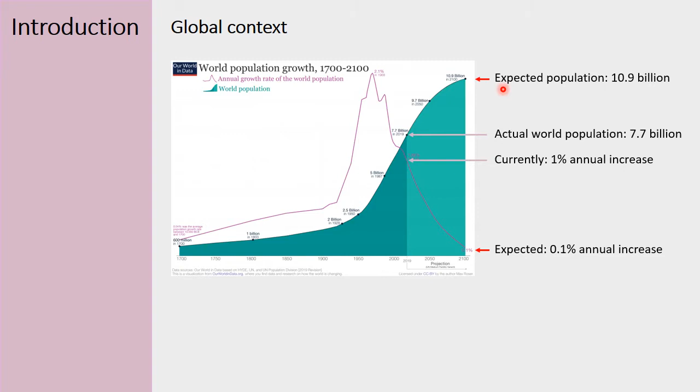The world population has been increasing, and we have currently attained a yearly increase of 1%, leading to a world population of 7.7 billion people. It is expected that even though the increase rate will be reduced, the world population will be higher than 10 billion in 80 years. Therefore, the need for raw materials, houses, clothes, food and energy will highly increase as well.

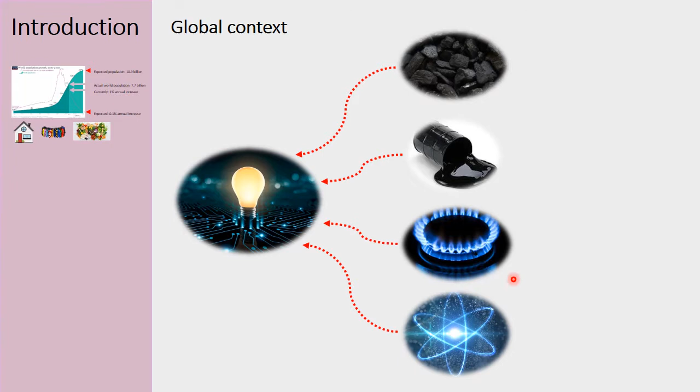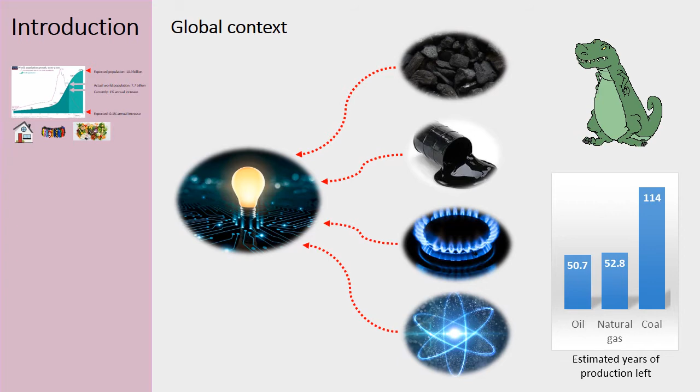Currently, the main sources of energy used worldwide are fossil fuels such as coal, oil, natural gas, and nuclear power. However, these sources are limited and we currently have a much higher consumption than production rate. For this reason, it's estimated that in the near future these sources will be completely consumed, which is why many researchers are currently working on substituting fossil fuels with renewable energy sources such as biomass, solar, wind, and hydroelectric power.

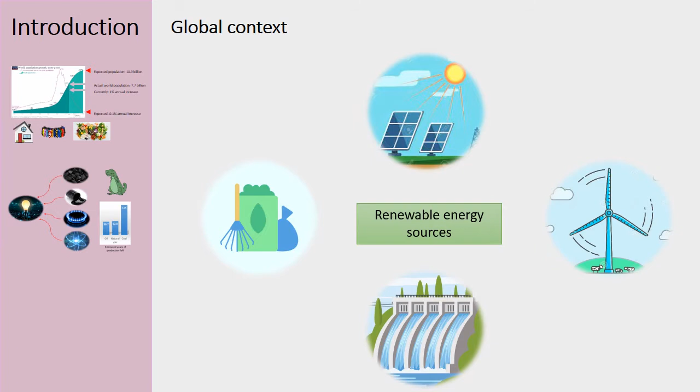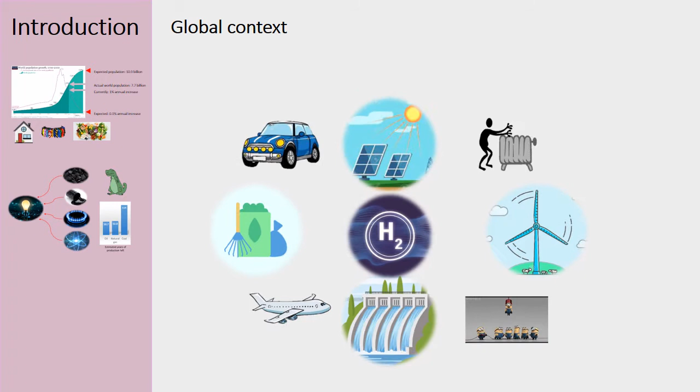Hydrogen is considered an important energy carrier because it can be used as fuel for transport, electricity, and heating. Currently, hydrogen is globally known and used for many applications. However, 95% of hydrogen is produced from fossil fuels. Even though it can be considered a clean energy, it is still not yet sustainable for the far future. For this reason, it's important to shift from fossil fuels to renewable sources as a source of hydrogen, for example using electrolyzer technologies to produce green hydrogen, or using chemical reactions such as the dry or steam reforming of methane.

Both of these reactions produce a synthesis gas made of hydrogen and carbon monoxide, which can be used individually or together in different industrial applications, such as methanol or ammonia production or Fischer-Tropsch processes. Even though these reactions have great advantages, such as eliminating one or two of the main greenhouse gases and producing a clean source of energy, they also have a big disadvantage, which is the endothermic nature of both reactions.

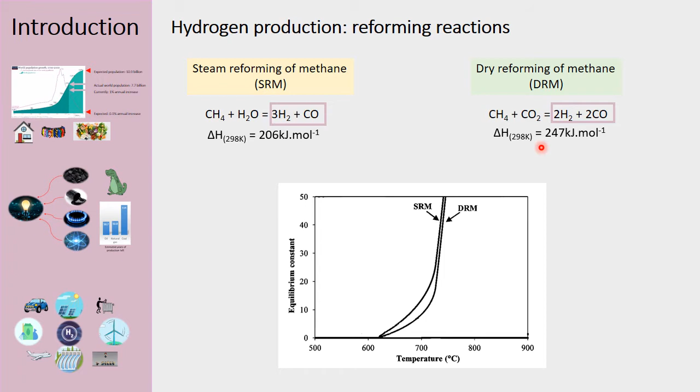This fact renders them thermodynamically impossible to occur at temperatures lower than 630 degrees. In the temperature range favorable for the dry reforming reaction, several secondary reactions such as methane decomposition, water-gas shift reaction, and Boudouard reaction can also occur. It's therefore important to use a catalyst in order to increase the kinetics of the DRM and SRM reactions at lower temperatures and to be selective to these reactions as opposed to secondary reactions.

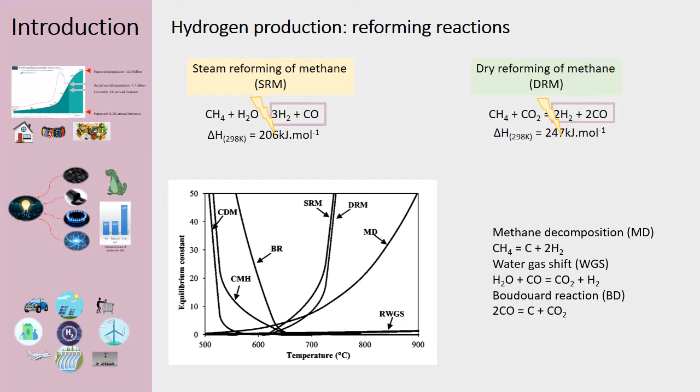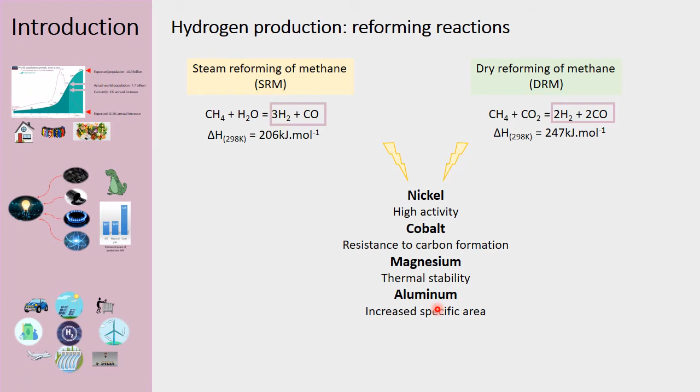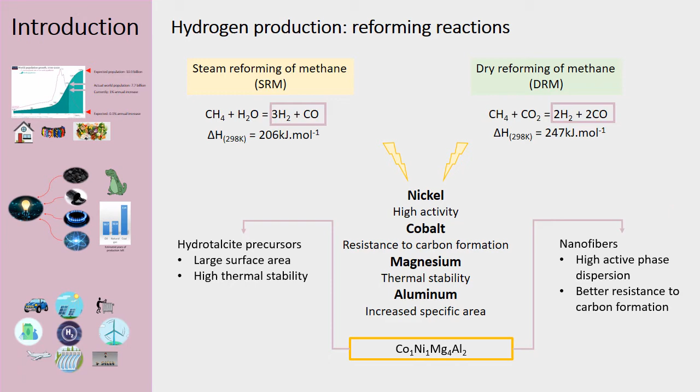The materials we used for this study contain nickel and cobalt, known for being active in the reforming reactions, magnesium, which increases the thermal stability of the material, as well as alumina, that increases the specific area. The materials were synthesized by two different methods to obtain hydrotalcite precursors that have a large surface area and high thermal stability, as well as nanofibers that increase the dispersion of active phase and increase the resistance to carbon deposition.

The nanofibers were synthesized using the solution blow spinning method. The solution containing the nitrates, ethanol, and PVP is inserted in an airbrush, projected using nitrogen onto an inox collector.

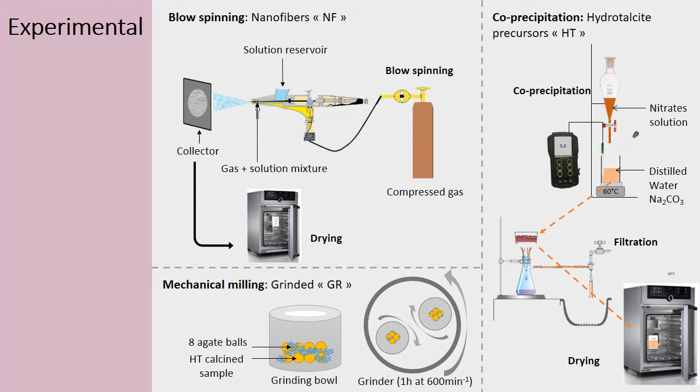Hydrotalcite precursors were synthesized by coprecipitation while maintaining a pH at 9. Both of the samples were calcined at 800 degrees for 4 hours. Part of the hydrotalcite calcined sample was ground in a mechanical miller for 1 hour in order to study the effect of grinding on the performance of catalytic materials.

The catalysts are tested in the steam and dry reforming of methane in this setup, with the only difference being the gas feed composition and flow rate. Prior to the test, 100 milligrams of calcined samples are reduced at 800 degrees for 1 hour using hydrogen. The CH4, argon, CO2 or H2O mixture is passed through the quartz reactor containing the catalyst and then analyzed by gas chromatography coupled to a TCD detector. The 12-hour stability tests are conducted at 700 degrees, during which the activity, selectivity, and stability of the catalysts is monitored.

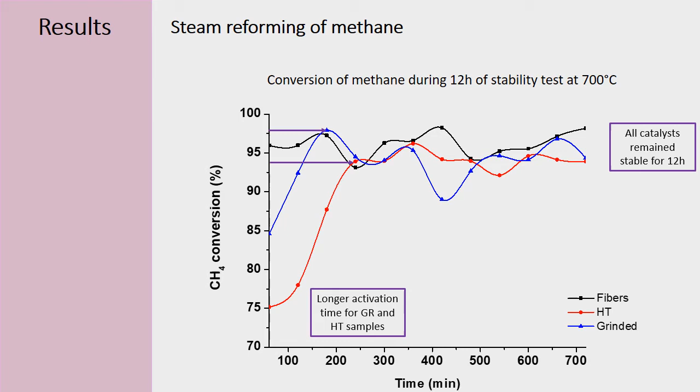This graph shows the activity and the stability of the catalysts by following methane conversion during the 12-hour tests. First of all, we can notice that all catalysts remain stable during the 12 hours. Moreover, an initial activation period was needed for both hydrotalcite and grinded catalysts, while the fibers were active since the beginning. This could be due to the reducibility of the oxides.

This graph represents the average methane conversion during the stability test after the initial activation period. A higher activity was noticed for the fiber materials. However, no difference was noticed between the calcined and the grinded hydrotalcite.

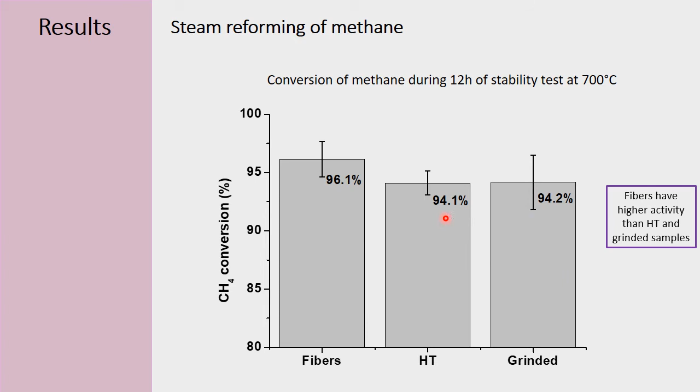Moreover, all three catalysts showed extremely high selectivity to hydrogen, which means that all of the methane that was converted was transformed into hydrogen. To find out if this was due exclusively to the steam reforming reaction, we monitored the H2/CO ratio.

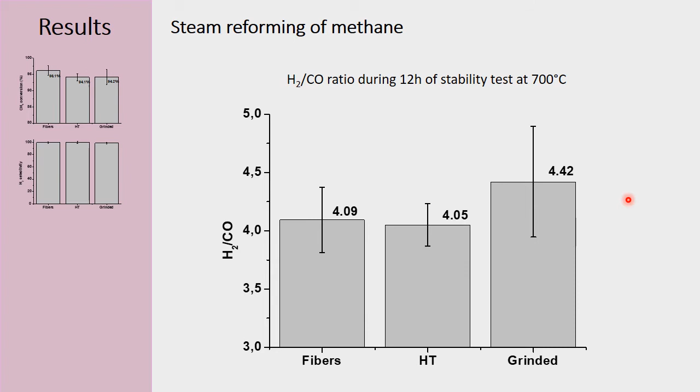As shown on the graph, the H2/CO ratio was superior to 3 for all catalysts, which means that secondary reactions are taking place, causing the quantity of H2 to increase and CO to decrease, or both simultaneously. In this case, the most probable reaction is the water-gas shift reaction, in which CO reacts with water to produce CO2 and hydrogen, which explains the ratio above 3.

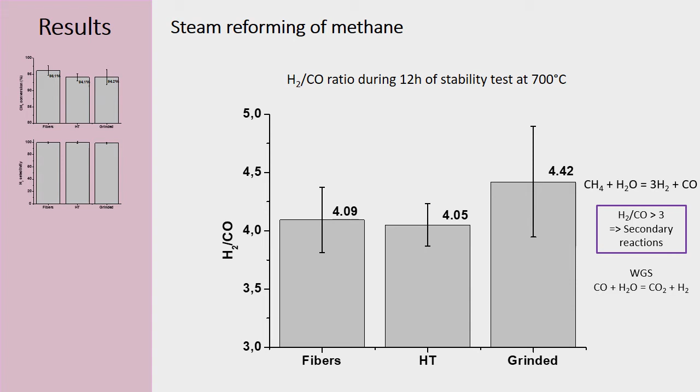The H2/CO ratio for the grinded catalyst was higher than the other materials, signaling that this reaction was favored in the presence of this catalyst. The occurrence of this reaction is confirmed by the presence of CO2 in the outlet gas.

The CO/CO2 ratio was used to determine the main reaction taking place. Having a ratio above 1 shows that not all of the CO is being converted into CO2. The lower CO/CO2 ratio of the grinded catalyst confirms the higher occurrence of the water-gas shift reaction.

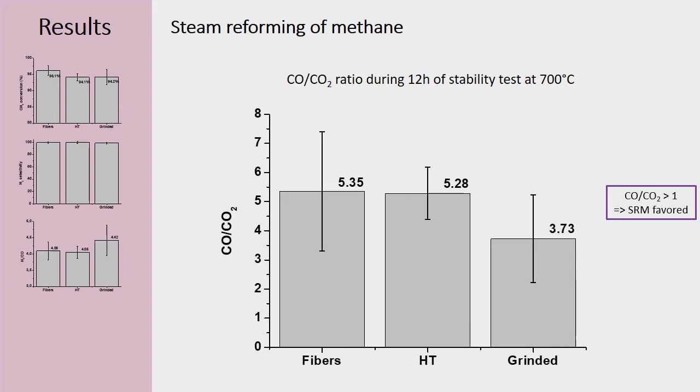Finally, the used catalysts were analyzed by DTA/TG to evaluate the carbon resistance capacity of all samples. Results show that after the initial weight loss related to water evaporation and the weight gain related to metals reoxidation, no weight difference related to carbon oxidation was observed, showing that either no carbon was formed during the test or that the carbon that was formed was directly oxidized by water, CO, or CO2.

This concludes the results for the steam reforming tests.

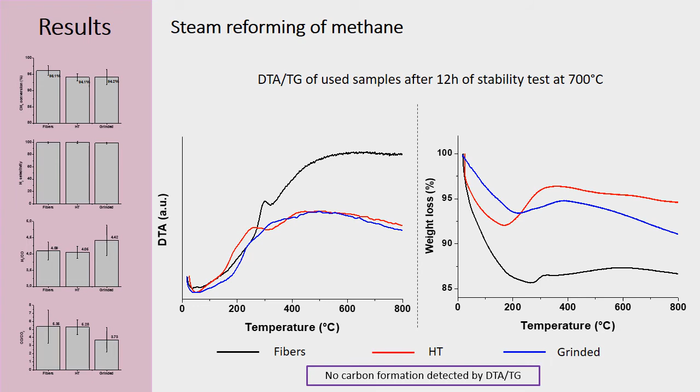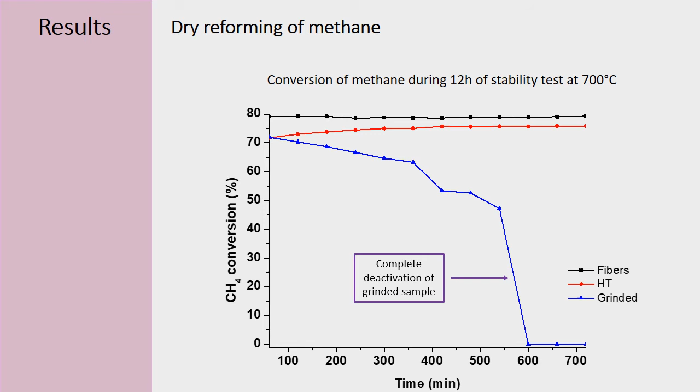As you can see on the graph showing the average conversion of methane during the dry reforming test, we notice that both catalysts show a high conversion of methane, with a slight advantage to the fibers.

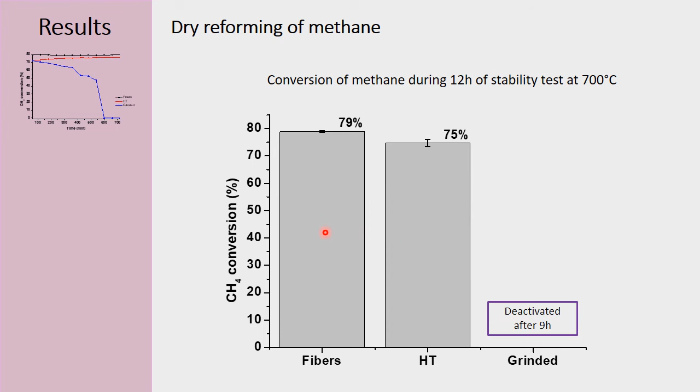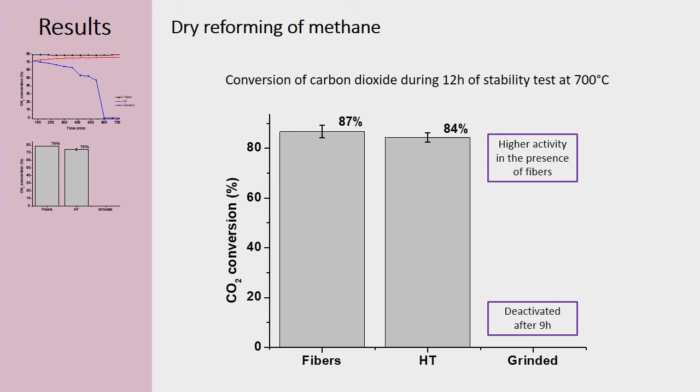The same tendency is noticed in regards to CO2 conversion. In addition, the conversion of CO2 being higher than methane signals to the occurrence of a secondary reaction. This is in accordance with the H2/CO ratio inferior to 1. This result is linked to the occurrence of the reverse water-gas shift reaction that consumes hydrogen and produces carbon monoxide.

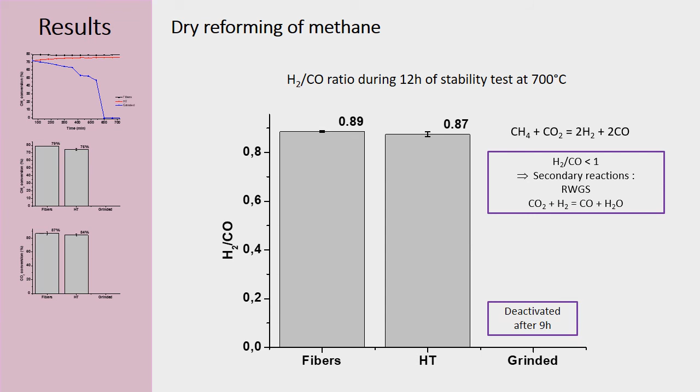The used samples were also analyzed using thermal analysis. This analysis has led to the identification of the cause of deactivation in the case of the grinded catalyst. The DTA results for this catalyst show two exothermic peaks at 460 degrees and at 500 degrees related to two different types of carbon. Both of these peaks are linked to a carbon-related weight loss of 58%. This catalyst was deactivated by an excessive formation of carbon.

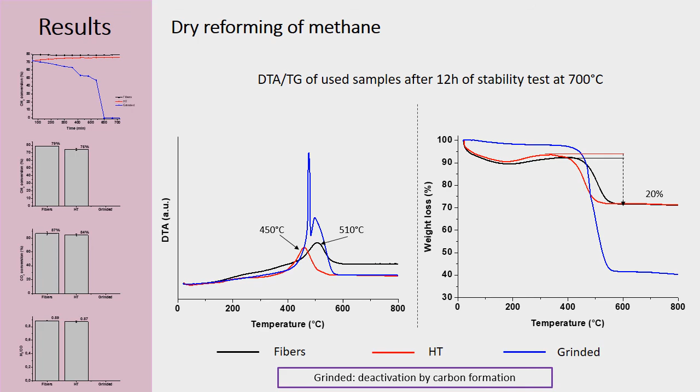The other two catalysts produced carbon as well, but in a lower quantity. On the DTA graph, we can notice two peaks at 450 and 510 degrees, related to a weight loss of 20%. This quantity of carbon was not enough to deactivate the catalysts. It's interesting to point out that the carbon produced in the presence of hydrotalcite sample was oxidized at lower temperature than the fibers. This difference could play a role in a longer stability test.

In conclusion, the studied materials are active in both reactions. The fibers showed the highest performance in the steam and the dry reforming of methane reactions. Their stable and high activity as well as their low carbon formation are advantages towards an overall better catalytic performance.

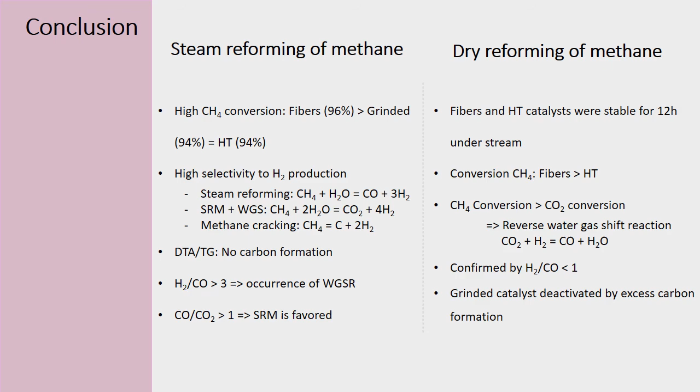The hydrotalcite sample was also highly active in both reactions, with a carbon formation in dry reforming of methane similar to that of fibers. However, the grinded sample favored the water-gas shift reaction during the SRM, which could be interesting from an industrial point of view, but was not efficient in the dry reforming of methane reaction because of an excessive production of carbon. Thank you for your attention.